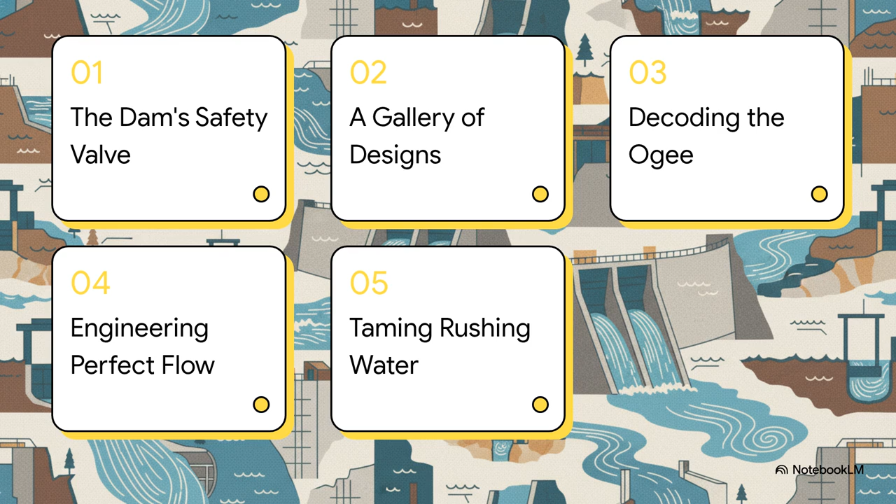So in this explainer, we're going to start with the basic problem that spillways are there to solve. Then we'll take a look at the beautiful variety of designs out there before we zero in on the most common one, the Ogee, to see how its shape is just a masterpiece of physics. After that, we'll cover the high-stakes challenge of getting that design just right, and finally, how it safely handles all the destructive energy it unleashes.

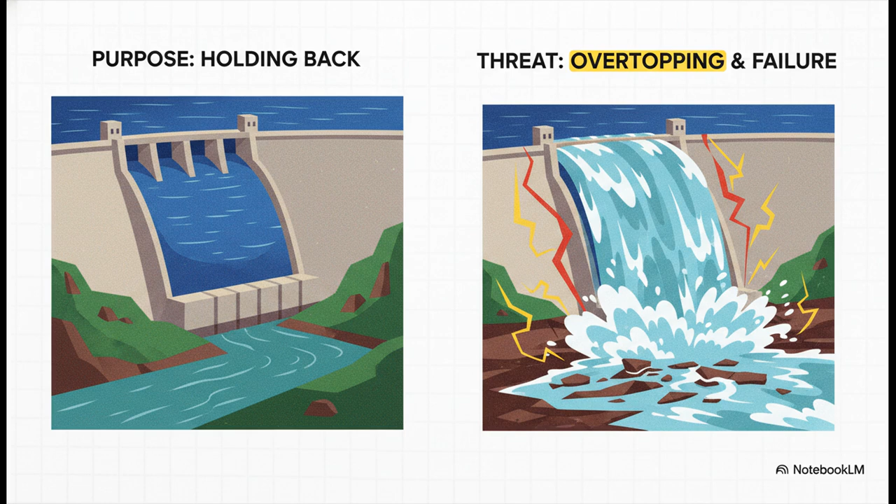Okay, so let's get into that core problem. A full reservoir is a good thing, right up until the moment it isn't. It's a pretty fascinating paradox when you think about it. The whole point of a dam is to store water, but an uncontrolled surplus of that exact same water can lead to something called overtopping. That's when water spills over the top of the main dam, and that can really quickly erode the dam's foundation and lead to a totally catastrophic failure.

And that question right there leads us to the hero of our story, an engineering solution that's designed to be the ultimate protector. And here it is, the spillway. It's so much more than just a channel. It's a precisely engineered safety valve. Its entire job is to give that extra water a safe way to get from the reservoir to the river downstream, making sure the dam itself is never, ever overwhelmed.

Now, as you can probably guess, there isn't just a one-size-fits-all solution for this. The design of a spillway depends a lot on the type of dam, the shape of the valley, and of course, how much water it needs to be able to handle. And you can see just how diverse these solutions are. You've got simple straight-drop spillways for smaller dams. You've got long chute spillways that are basically like massive concrete slides. You see those a lot with earth-fill dams.

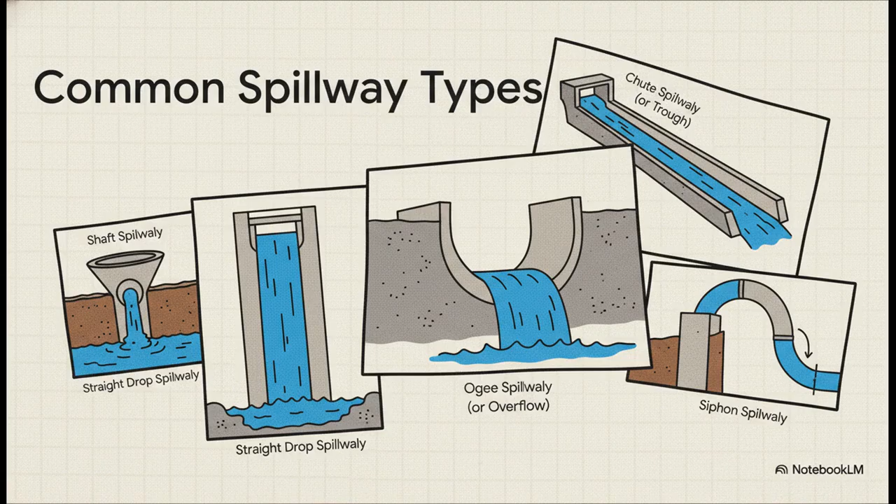And get this, there are even shaft spillways that look like a giant drain in the middle of a lake. They're perfect for narrow canyons where there's just no room for a big, long spillway. But today, we're really going to focus on the most common and iconic one of them all, the Ogee. The Ogee spillway? That's that classic, really elegant S-curve you see on most big concrete dams. But that shape, it's not just for looks, not at all. It's a work of pure hydraulic efficiency, and the secret behind it is actually remarkably simple.

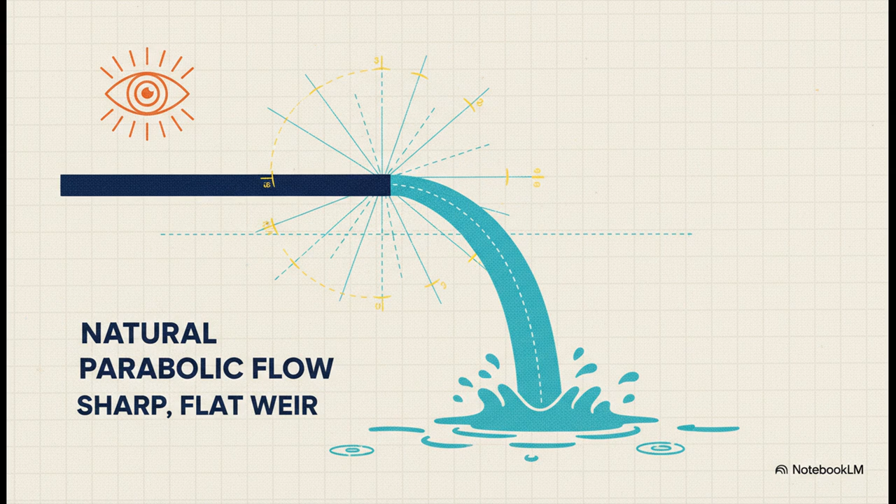So, to design the perfect spillway, engineers started by looking at the simplest possible scenario. What does water do when it flows over a sharp, flat ledge, like a really basic weir? They didn't try to force the water into some shape, they just watched the shape the water wanted to make all on its own. The key to the whole thing is a concept called the nappe. That's the technical name for the underside of that sheet of falling water.

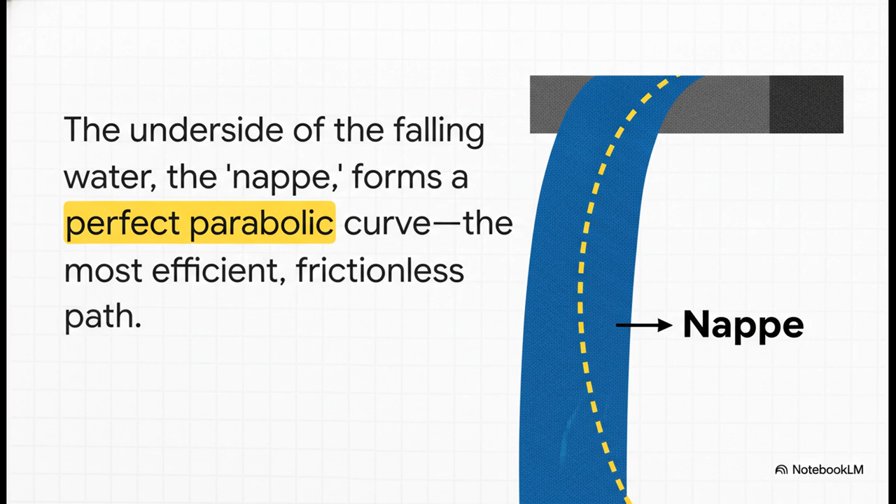And as gravity pulls on it, this nappe naturally forms a perfect parabolic curve. This is the most efficient, the most frictionless path that the water can possibly take. And this is where the genius comes in. Engineers realized they didn't have to invent a shape at all.

They just needed to build a solid structure that perfectly matched the profile of that lower nappe. So that Ogee S-curve, it is the shape of falling water. And that allows the flow to just glide smoothly over the surface with almost no turbulence. So engineers just build a concrete slide in the shape of falling water.

Sounds simple, right? Well, not quite. That perfect harmony between the water and the concrete, it only really exists under one very specific condition. And if you get that condition wrong, you've got a really high-stakes balancing act on your hands.

Yeah, the crucial point is right here in the source material. That perfect Ogee curve is calculated for a single specific depth of water flowing over it. They call this the design head. Any change from this perfect depth, whether it's more water or less, starts to create problems.

And this really breaks down that balancing act. If the water level is higher than what it was designed for, the fast-moving jet can actually pull away from the concrete surface, creating these little pockets of vacuum. On the other hand, if the water level is too low, the jet kind of sticks to the surface, which creates positive pressure and actually slows the flow down, making the spillway less efficient.

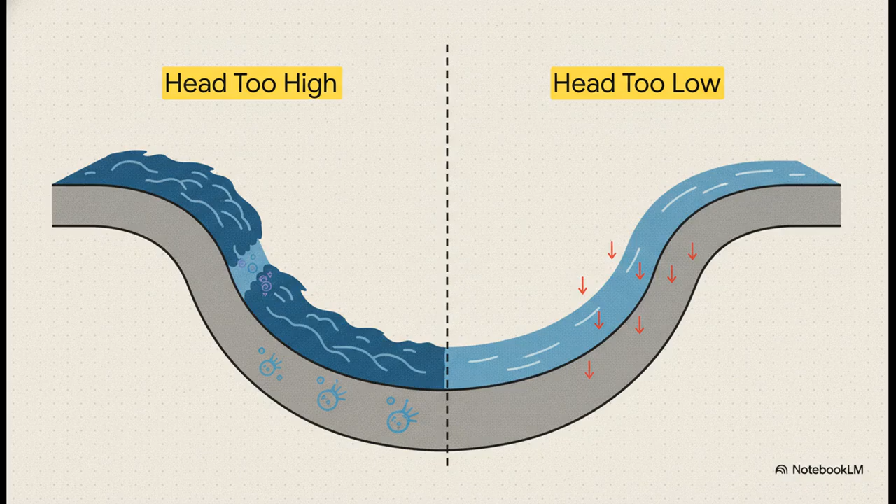Okay, let's talk a little more about that high head danger, cavitation. This is wild. That negative pressure can actually cause the water itself to boil at a low temperature, forming these tiny vapor bubbles. Now, as these bubbles flow downstream into areas of higher pressure, they don't just pop, they violently implode. And each one of those collapses generates a tiny but incredibly powerful shock wave, like a microscopic jackhammer that can pit, erode, and over time literally destroy the spillway's concrete surface.

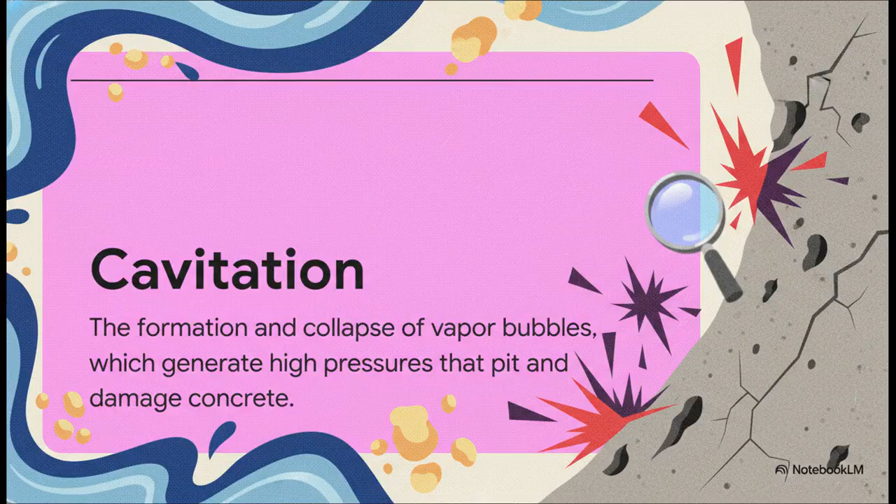So, okay, the spillway has done its job. It's successfully guided the water over the dam, but its work isn't finished yet. Now it has to deal with the colossal amount of energy that it has just unleashed. You see, as water falls from the height of the reservoir, all that potential energy gets converted into kinetic energy. We are talking about a massive, high-velocity flow that, if you just left it alone, would act like a giant pressure washer, just scouring away the riverbed and potentially undermining the dam's very foundations.

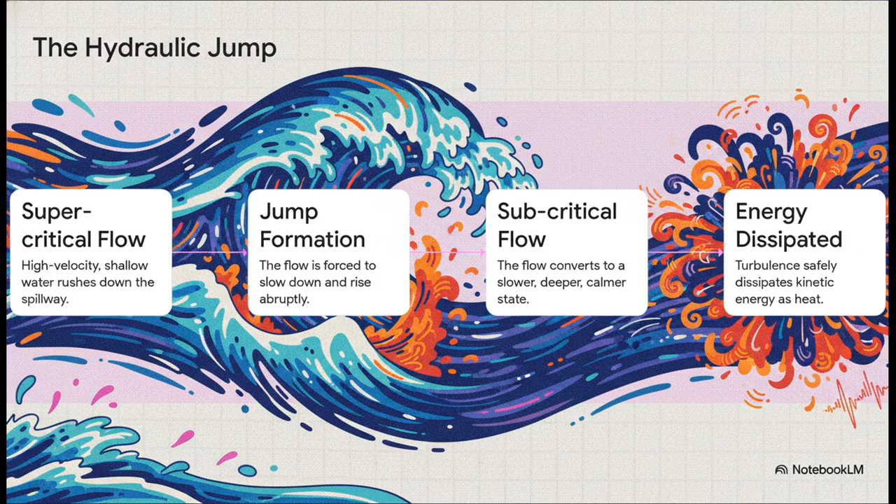So the number one tool for taming all this energy is a pretty fascinating phenomenon called the hydraulic jump. It's this really abrupt transition where the fast, shallow, kind of chaotic flow from the spillway, engineers call that supercritical flow, is forced to become a slow, deep, and much calmer subcritical flow. This all happens inside a structure at the bottom called a stilling basin, and the sheer turbulence of the jump violently burns off the water's kinetic energy into harmless heat and sound.

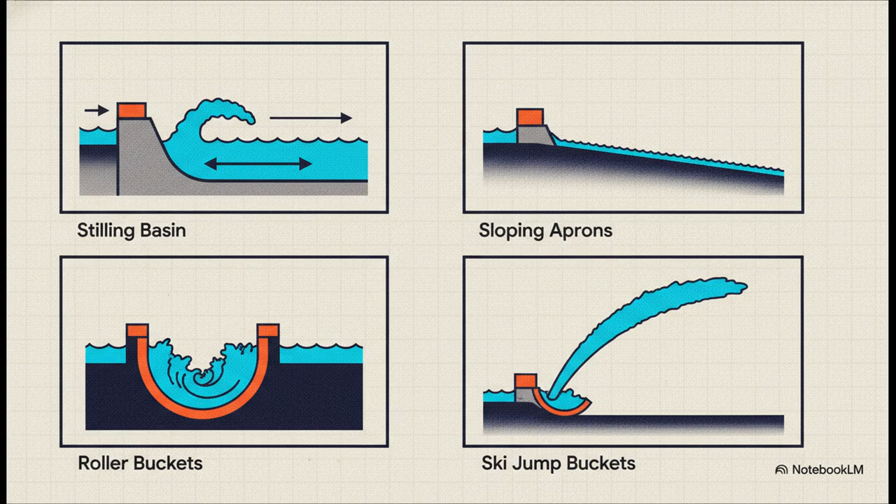But of course, the stilling basin isn't the only way to do it. Engineers have a whole toolkit of what they call energy dissipators. You've got roller buckets that create these big energy-burning eddies, and ski jump buckets that literally throw the water jet way downstream so it lands safely away from the base of the dam. The one they choose really just depends on the geology of the riverbed and the specifics of the flow.

So, the next time you see a large dam, look for that graceful curve of the spillway. It's not just another part of the structure, it's the dam's ultimate safety valve. It's really a testament to how just observing the simple physics of falling water can lead to an engineering solution that protects thousands of lives and massive infrastructure, all while kind of hiding in plain sight.